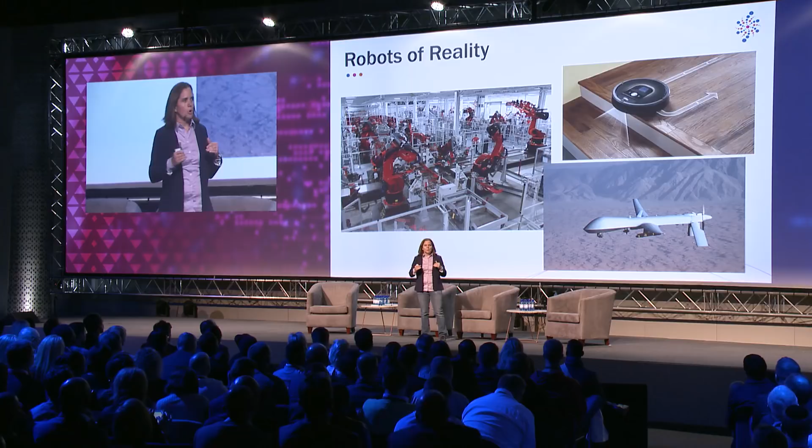And if we think about the robots of reality, they kind of match what we think of in our heads. So we have robots that help us, right? They manufacture goods for us, things like auto plants and manufacturing. We have robots that help clean our houses, like the Roomba and the Neato. And then we have scary robots, like the Reaper, that's been flown over Afghanistan and a number of countries.

So I want to be very clear here about what I mean by robot. I was actually impressed to know, when I showed up here, that robots are ubiquitous in South Africa, right? I'm not talking about traffic lights here.

So what I mean by a robot is something that senses and perceives its world, makes decisions based on that, potentially with the input of a human, kind of like what we just heard about, and then acts upon that and moves within its world. So those are the kind of robots that I'm talking about.

And we have two different types, and obviously a lot of hybrids in between. We have autonomous robots that do all of that on their own, so that would be like the Roomba - you just press go, it vacuums your floor, and then goes back to its charging base. And then you have teleoperated robots, where a human is actually a big part of the control, like the drone that you saw earlier when you came in here, or like the Reaper in this picture.

So there's a fair amount of interest in robotics as an exponential technology, and since I'm giving this talk here, I think it's pretty obvious that a lot of people think this way. But I think one of the interesting things right now is that the robots of reality are starting to get to the point where they have similar capabilities to the robots of our imagination. And this is a problem that roboticists fall into a lot - people imagine robots doing all of these crazy things. Well, we robotics researchers aren't quite there yet, but we're getting there, and we're getting there very quickly.

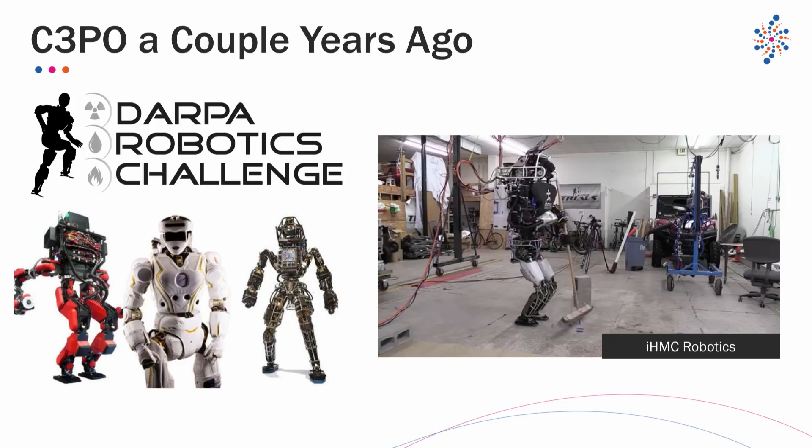And the idea that if you just had a robot that could have gone in there and turned a valve, you would have saved a lot of problems. So this robot had to complete a number of tasks: be able to crawl through or walk through a rubble field, turn a valve, open a door, get into a Jeep and drive it. There were a number of tasks that a human would be able to do just fine, but was a challenge for the robot. And what you see in this video is a robot effectively doing household chores.

And the video is sped up, the robot was a lot slower than this. But it's really not doing anything more complex than I am convinced my 4-year-old can do, although she doesn't do it. All right, so these are the kind of things where robots are kind of at this toddler level.

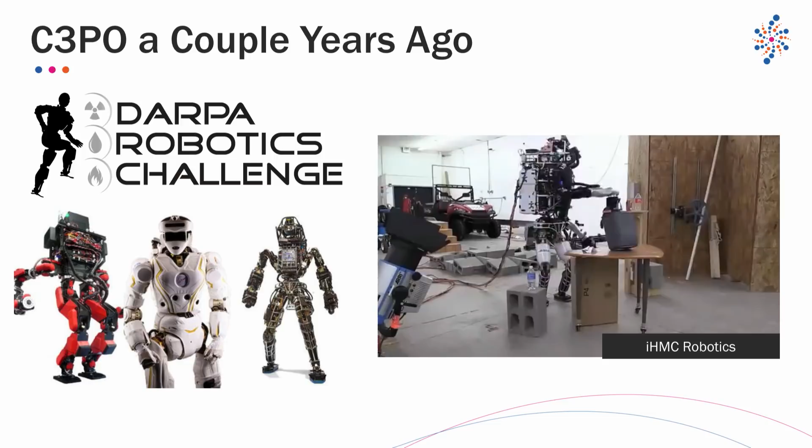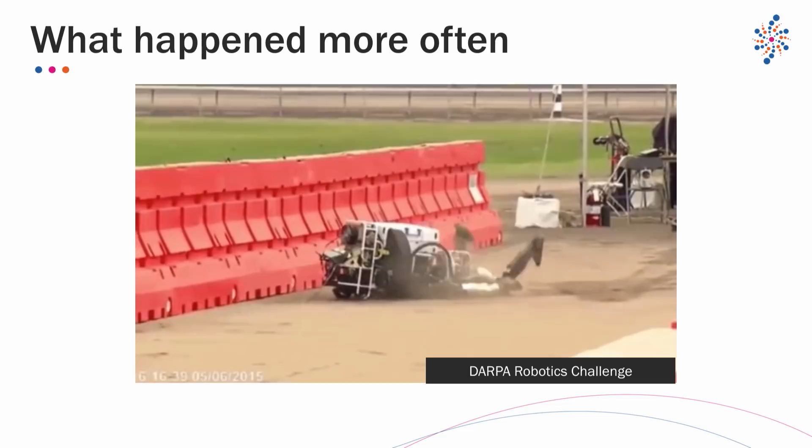And interestingly, when you got to the competitions in the finals in summer 2015, what you saw more were things like this. So this is really what you see a lot in robotics of reality - this is like my 2-year-old, oftentimes she'll be running and crash.

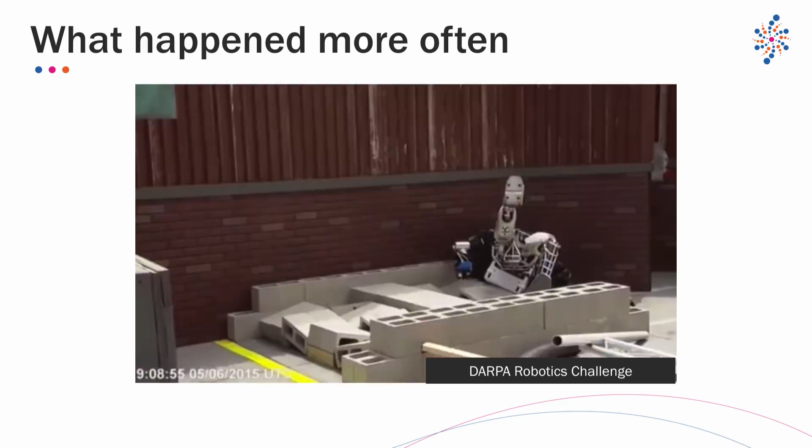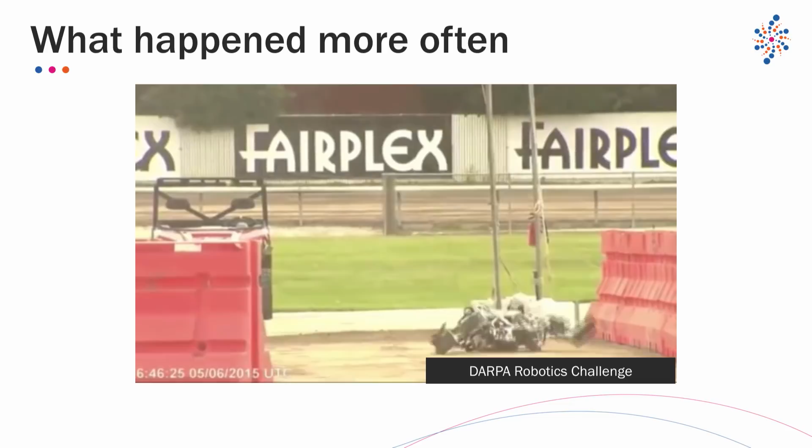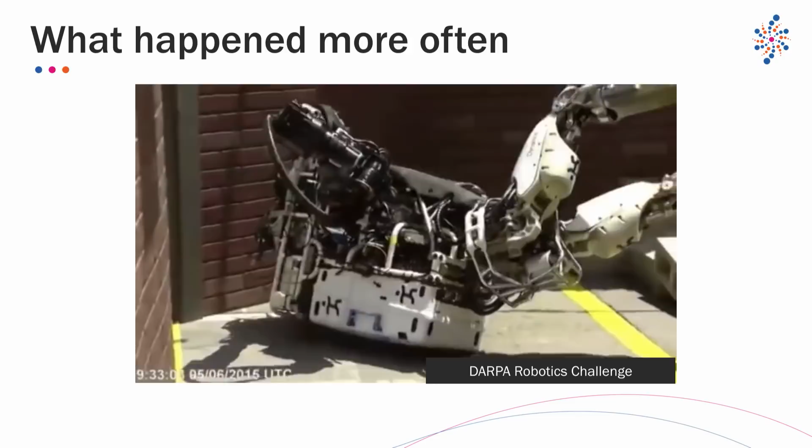This happened a lot in this competition, and there's a lot of technical reasons for that. One thing I want to make very clear is all of the robots you see on YouTube doing really cool things, there is at least hours of footage of them failing, unless there's been painstaking tuning or it's stated otherwise. This happens a lot in robotics, usually when your advisor is looking over your shoulder for a demo.

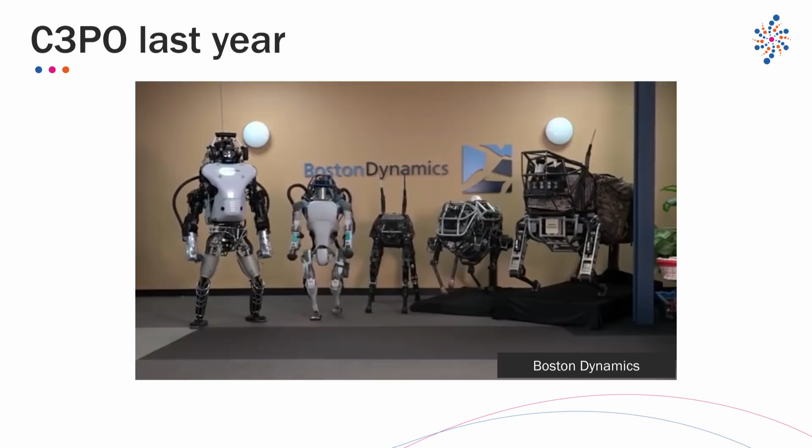Just last year, Boston Dynamics came out with a new version of Atlas that looks like this. One thing you notice right away is it moves faster and it's much more robust to its environment. It's walking through snow here. Some of you have probably seen the Big Dog videos from the same company. This is the same basic idea.

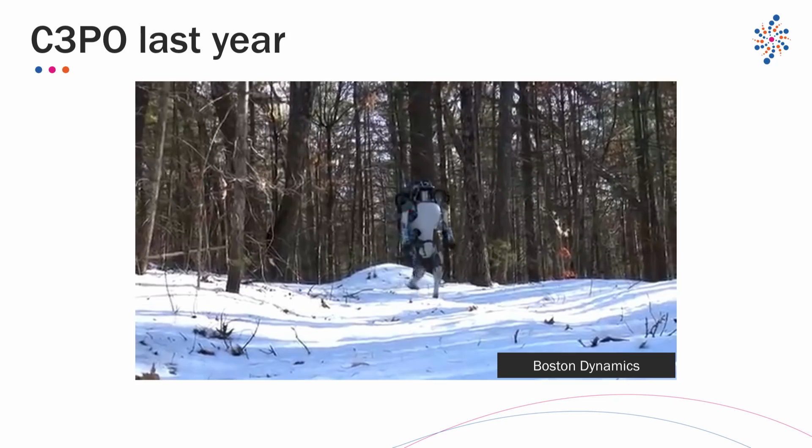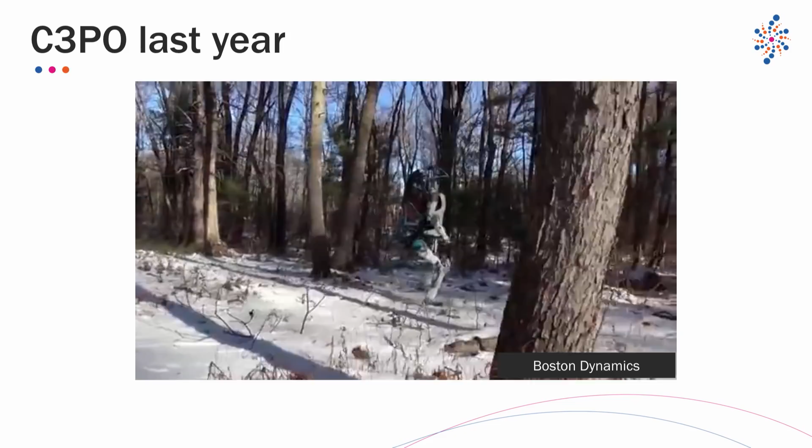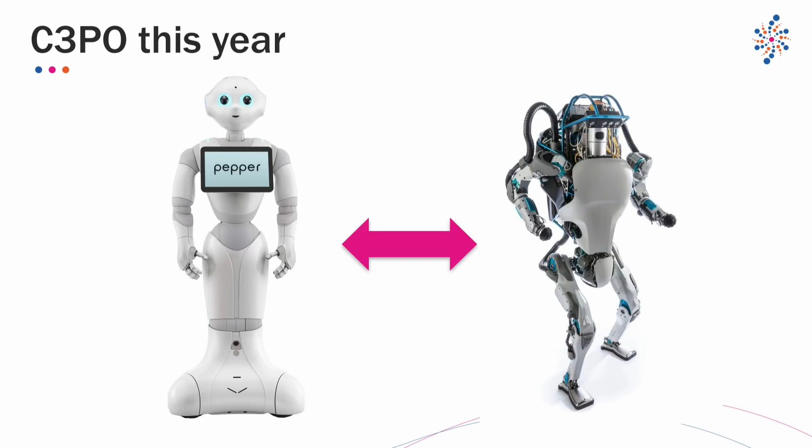This was enabled through a lot of technical developments, including things like 3D printing, which doesn't seem immediately connected, but is very connected to this. And then finally, just a couple months ago, it was announced that SoftBank is buying Boston Dynamics from Alphabet. SoftBank is responsible for the Pepper robot and the Nao robot that you can probably see up there.

These are very social. SoftBank's robots are designed to be very social. So I'm really interested to see what happens when you combine the physical capabilities of something like Atlas with the more social capabilities of something like Pepper. I think that's ultimately the interesting direction that SoftBank wants to go.

So there are a lot of reasons, I think, for this exponential growth in robotics. Obviously, you have computation, right? You throw more computation at a problem, it becomes technically easier. Another big thing is sensing. One of the sensors that's been developed has enabled the whole autonomous car thing, and a sensor is also responsible for the drones.

Just having an accelerometer and a gyroscope in a small chip package is what makes drones really possible. Autonomous vehicles are enabled by what we call RGBD cameras that also give you depth information in addition to the normal color stuff. So sensors have really helped push robotics forward quite a bit. They enable the robot to perceive its world much better.

Another big thing that is probably neglected a lot is the open source movement. A lot of the robots, including Atlas that you just saw, actually has code that works on it that's written in what's called the robot operating system. It's basically a database of code where you can try so-and-so's navigation algorithm or so-and-so's stability algorithm, and you can easily innovate on top of work that people have already done.

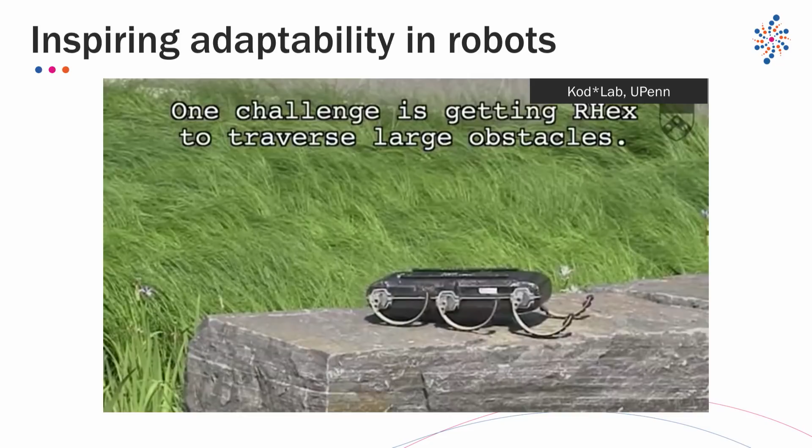But it does a pretty good job of getting through this kind of park environment. It can run through gravel, it can run through sand, it can do a lot of pretty impressive things, including jumping around. So this is actually the basic idea spun into a commercial enterprise called Ghost Robotics.

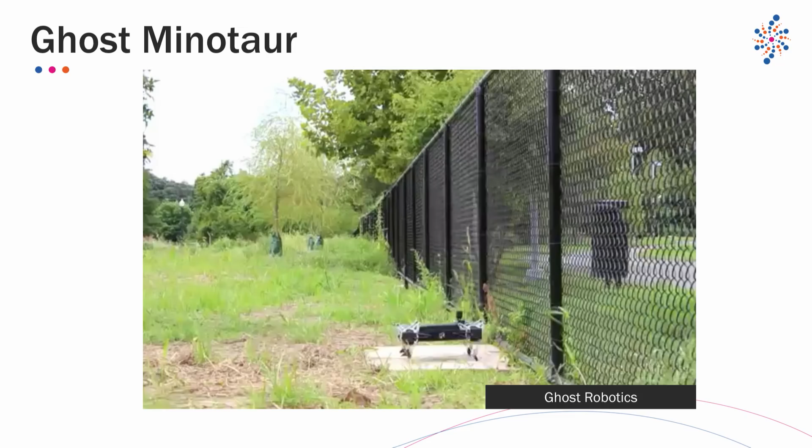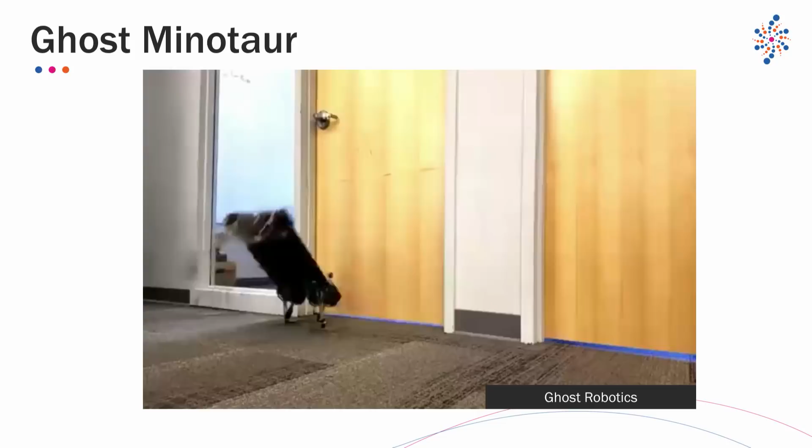And they do a lot. One of the things I didn't mention about RHex is a lot of that was due to the compliance of the legs. Just making the legs a little springy is what enabled it to do all of that impressive stuff. So Ghost Robotics, if you have $10,000 to spend, you can really prank your office mate by having this guy walk into the door.

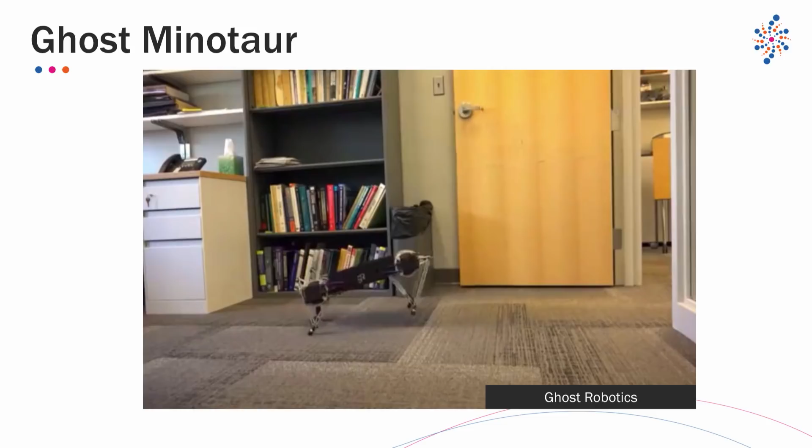So it costs about $10K, but it's a pretty impressive robot. A lot of what enables the Ghost Robotics robot is new developments in motors. I wanted to show this in part because this motor development happened because Sangbae Kim, whose arm you see in this picture, was trying to make a robot cheetah. He was trying to make a robot that could run incredibly fast, that could leap, as you see in the picture, and withstand the kind of perturbations and impacts that you would have in an unstructured environment. I'm very clumsy. I run into door jambs all the time.

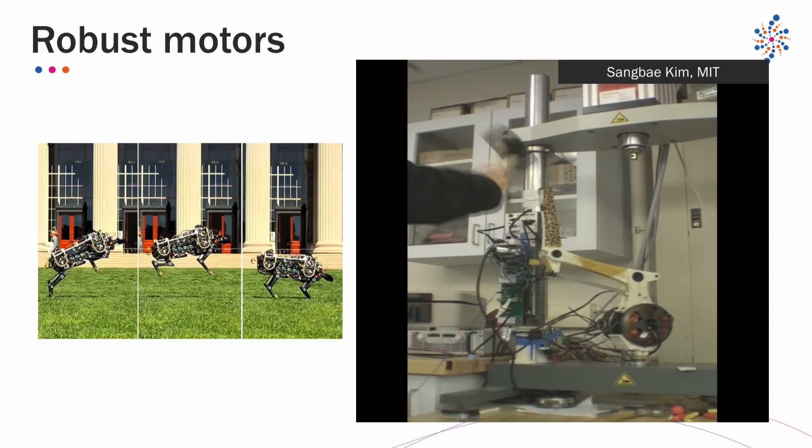But a robot like this could handle that kind of disturbance. This behaves a lot like the way muscle is, in that I can tighten my muscles and behave differently as I impact things. And so this allows us to get into new manufacturing environments, new application areas like mining, where you have a lot of bumping around and stuff as well.

Another way to become adaptable is to become very small. Ants are everywhere in the world. Spiders are everywhere in the world. Insects are ubiquitous, and this is from my own work. I confess this is a real ant and a real robot, but it happens to be a particularly large ant, a bullet ant from South America. But the robot itself is pretty small too, about 5 millimeters on a side.

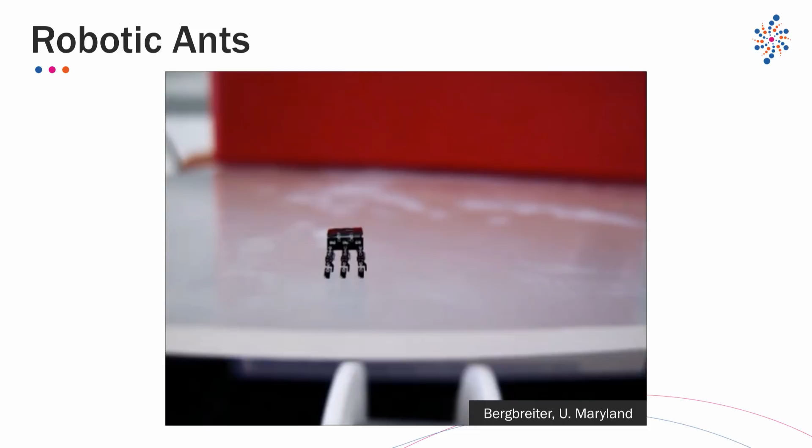One of the things we're doing with this is studying how to locomote when we're very small, as well as studying integration problems of how you combine motors and sensors and mechanisms at these really small size scales. And that can ultimately have a lot of impact in things like healthcare.

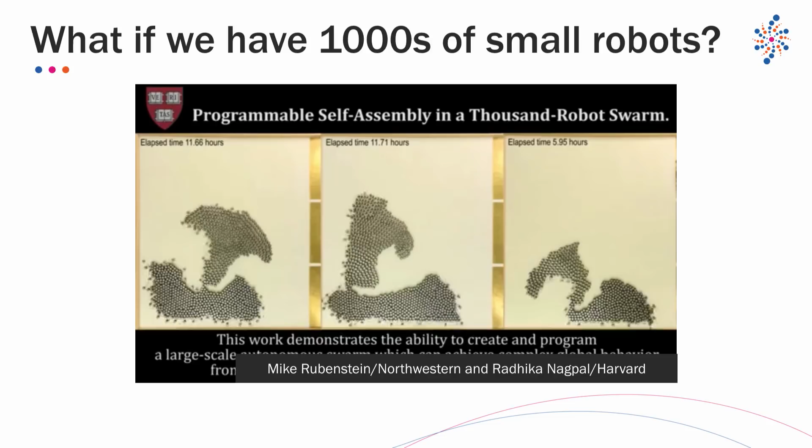Then you have the other idea: if I have a lot of small, simple robots, but I have a lot of them, say 1,000, this came from Radhika Nagpal's lab at Harvard, I can make them incredibly adaptable by making them into any shape I want. In this case, I have literally 1,024 robots, called kilobots, creating these shapes based on different algorithms defined on each robot. So it's pretty impressive stuff you can do if you have a lot of small, simple things in terms of adaptability.

So in addition to locomotion and being able to get around your environment, adaptability is also incredibly important in things like logistics applications and manufacturing.

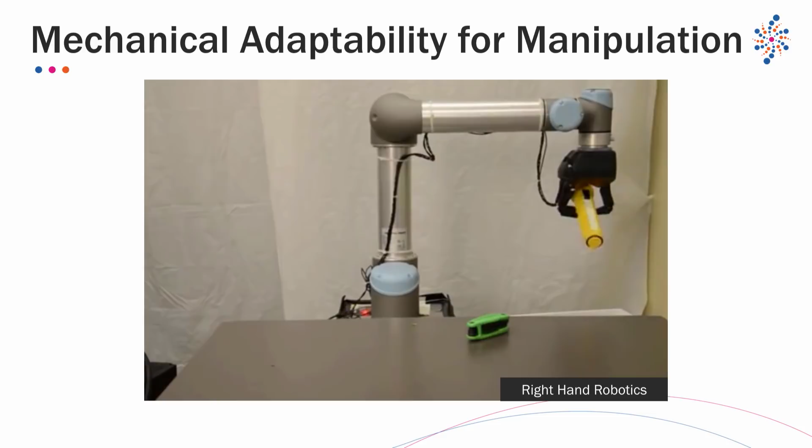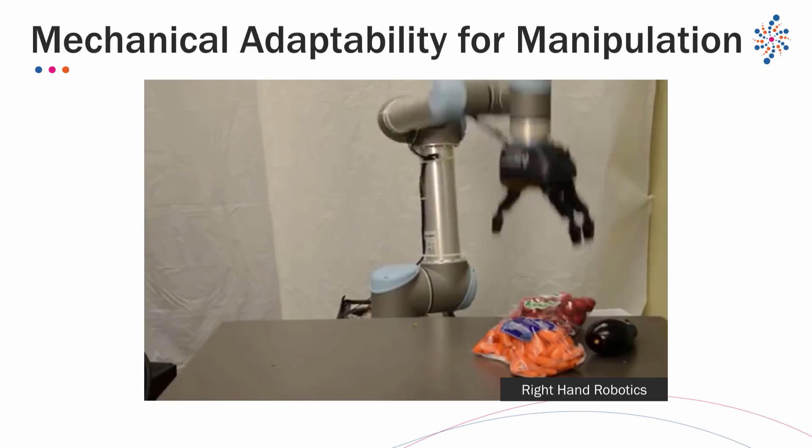This is a company where I have a friend, Right Hand Robotics, where they're actually designing a robot hand. Robot hands traditionally, unless I know exactly what my part looks like, have a lot of trouble picking up a part, especially if it's squishy or soft. In this case, what they've designed is this very compliant robot hand, much like the legs in Rex and the ant you saw earlier, that's able to conform to whatever shape it's picking up, a lot like we do with our own hands. But we have a lot of muscles that enable that. So we can make hands much more capable than they've done in the past.

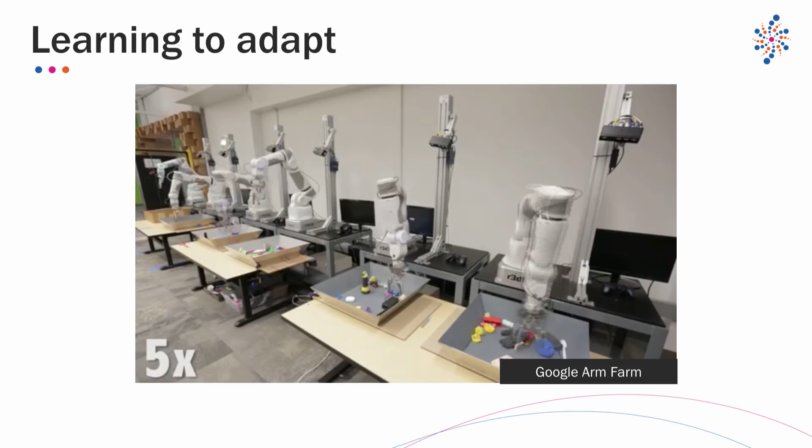We can also do things like incorporate AI and learning networks. This is a room at Google in California, and they have just a boatload of robot arms continually trying to pick up objects and determining, was I successful? Did I pick it up, or did I not? And changing the strategy a bit each time. Based on this, I can learn good strategies that work even with very simple grippers.

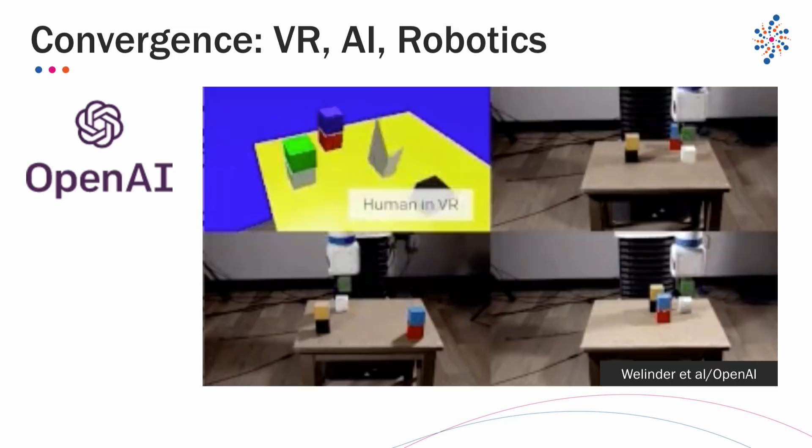This is one of my favorite new things. This happened about in May, a couple months ago. It came from the OpenAI project that Elon Musk has a lot of input into. In this case, what they were trying to do is take a human in virtual reality with one episode of training on a task. It's a very simple task, just stacking blocks. But based on that one episode in virtual reality, they had a robot learn how to do the same task regardless of where the blocks were originally. Now, in stacking blocks, once again, a 9-month-old can literally do that.

Right? At least 2 blocks, then they knock it down.

But in this case, what you're really doing is looking at this convergence of all of these different exponential technologies, virtual and augmented reality, AI, and robotics, and ultimately thinking about how I can have a surgeon in one place, maybe South Africa, training a robot surgeon somewhere else.

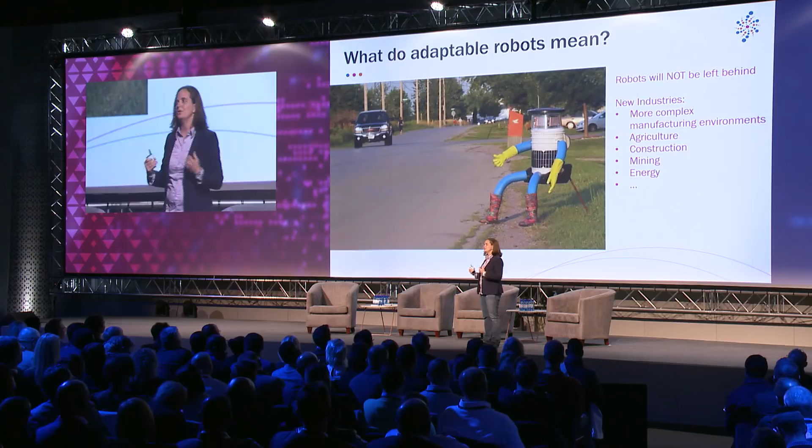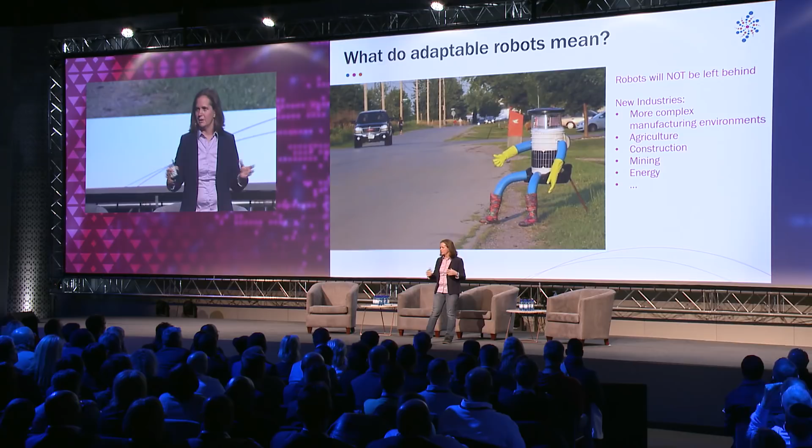And you can really think about the possibilities that are enabled by all of these technologies coming together, which are really exciting. One of the things that adaptable robots ultimately mean for us is that robots aren't going to be left by the side of the road anymore in a lot of these applications. We already have a lot of automation in things like agriculture and mining, but that's going to be much more so. Construction, things that require us to be adaptable to these unstructured environments, are going to be enabled by robot innovation in the future.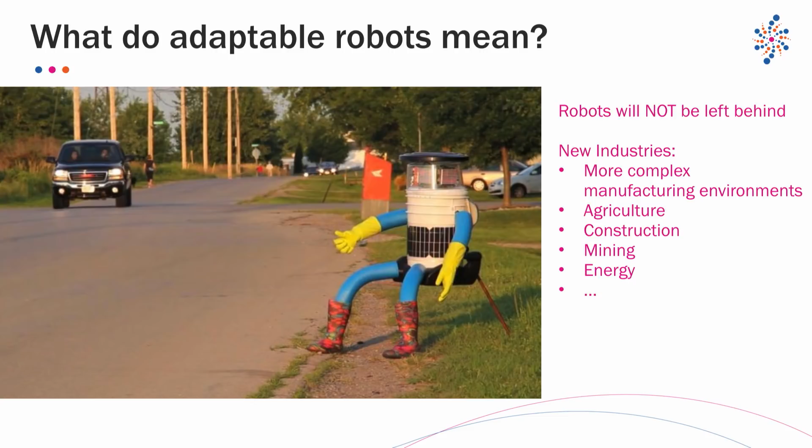We also have things like more complex manufacturing environments, and by that I mean manufacturing environments with people in them. So the fact that I have a person working next to me ultimately will not be a problem for these more adaptable robots.

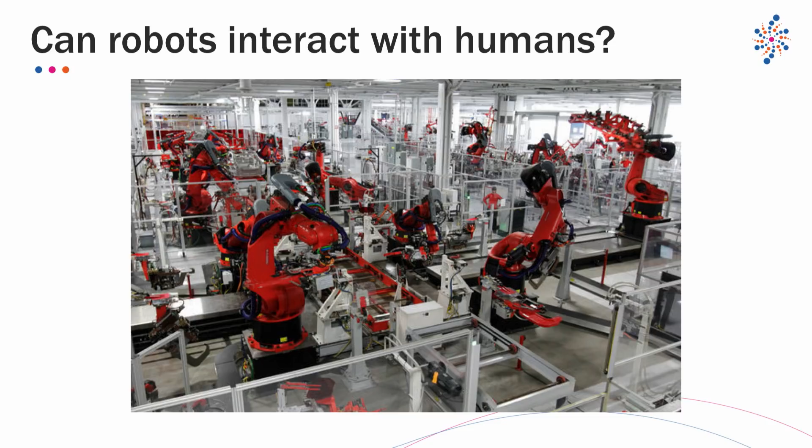And so ultimately what we want to do, if we want to augment human physical ability in things like manufacturing, we need robots to be able to work alongside people.

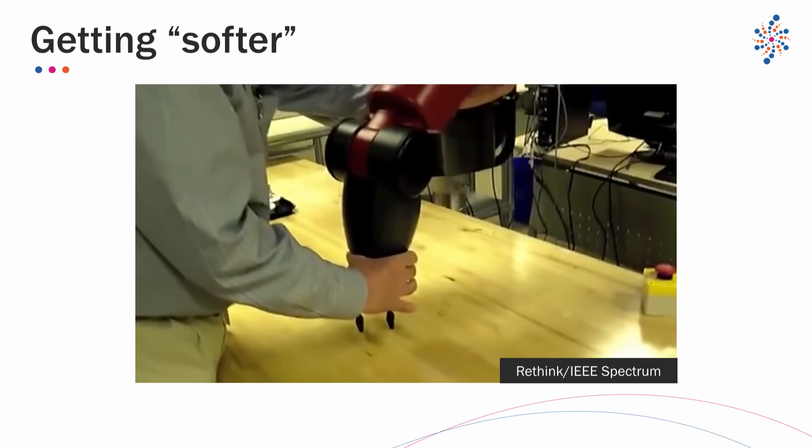So this is Baxter, which you saw earlier. One of the coolest things about Baxter is that this guy is actually touching Baxter, moving Baxter's arm, and in fact programming Baxter what to do based on how he's moving the arm. A lot like you'd take your kid and say, okay, you pick up your fork and then you stab it into this and you eat it, and you move their hand through the whole process.

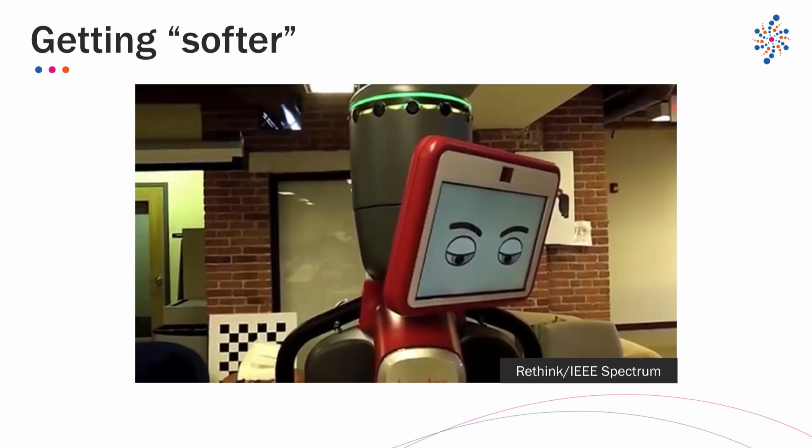This is how you can program a robot if you can touch it. So creating robots that are touchable, that can interact physically with humans, is a game changer in the world of manufacturing and the world of programming.

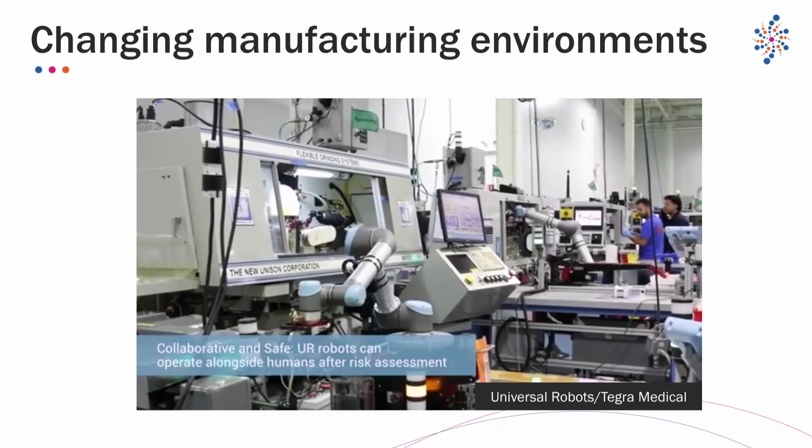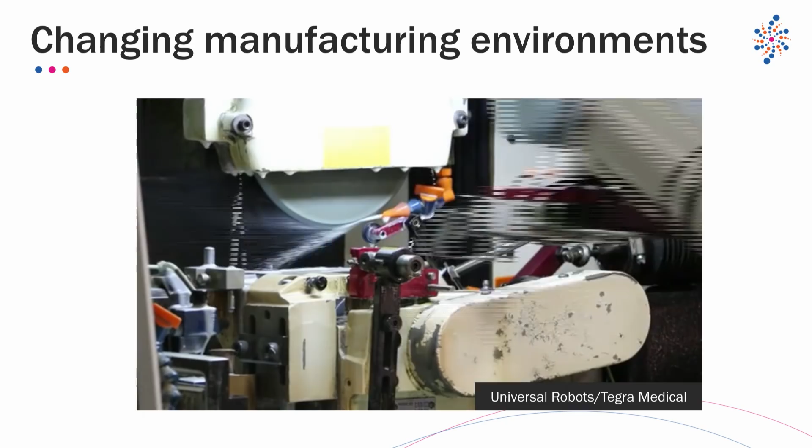This is actually a fairly low-cost robot at $25,000. But I can make things even more low-cost. This one is about $20K from Universal Robots, and it's actually in a manufacturing environment making medical devices. The idea of being able to have people and robots located right next to each other, and in fact physically interacting, ultimately means that I can take a room much smaller than this, put a bunch of robots in there that are relatively low cost, put a bunch of people in there, and create my own manufacturing system, at much lower cost than has traditionally been possible.

So you can actually have hardware startups now instead of just software startups. You can make things much quicker and easier with robots. And you can make them even cheaper if you change the materials that you're using and the actuation.

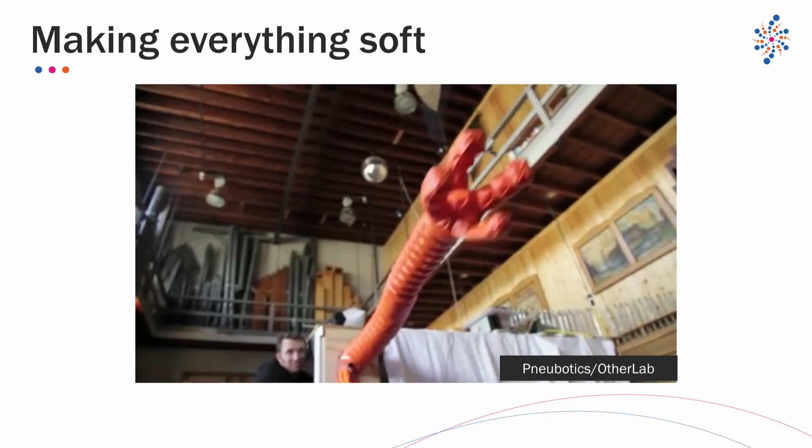So in this case, what you see is an entirely soft robot made out of fabric and air, from Pneubotics. And what you see it doing right now, it's going to start trying to draw a smiley face on this picture. And you see the problem with this robot: it actually draws a smiley face about the same way my 4-year-old draws a smiley face.

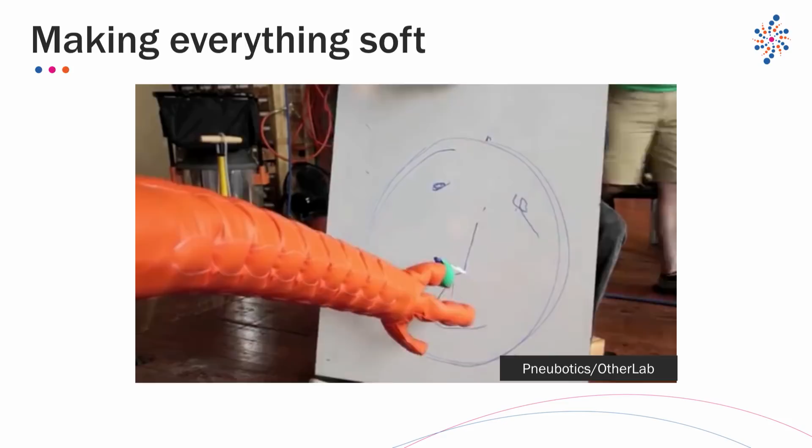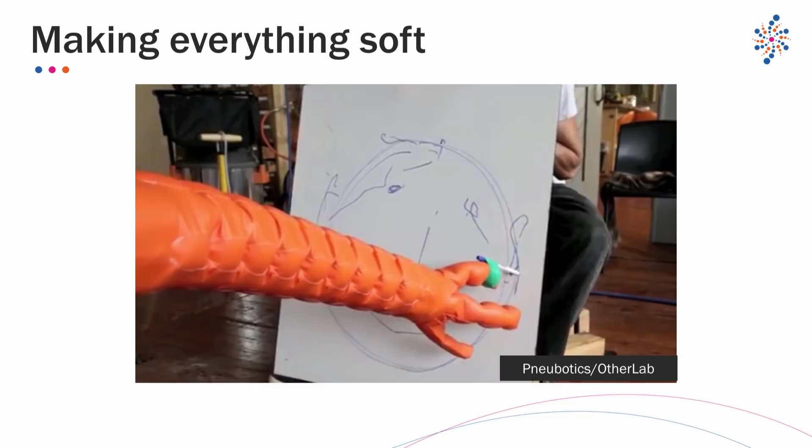One of those KUKA robots in the Tesla plant could draw perfectly. They could draw the Mona Lisa and do an amazing job. This one does not do so well. In soft robotics, though, this thing costs about $200. It's incredibly cheap. So if I can solve the problem of making these more precise and more repeatable, I can actually use that in a very low-cost manufacturing environment.

And in fact, I brought some things here. This is becoming such a thing in the robotics world of creating these soft robots that we have these floppy systems.

So this is a soft robot actuator that's made from the Soft Robotics Toolkit that you can look up online. Everything is open sourced, all of the designs. Molds are 3D printed, and then I mold this elastomer, this soft rubber, into it. You can see how it's soft and floppy. And if I inflate that with air, you can see it's more rigid now, and it's curling up. It can actually grab something, or you can imagine a much larger version of this.

Since we are in South Africa, I can say this is very much like an elephant trunk, right? So you can think about all the crazy cool things you could do if you had an elephant trunk that cost a couple hundred dollars, in terms of manufacturing, in terms of all sorts of things. So actually, if I don't kill you, I'll throw this out to you. You can pass it around. They're cheap enough that I don't care if I lose a couple.

You guys can pass it. It's in the other direction there.

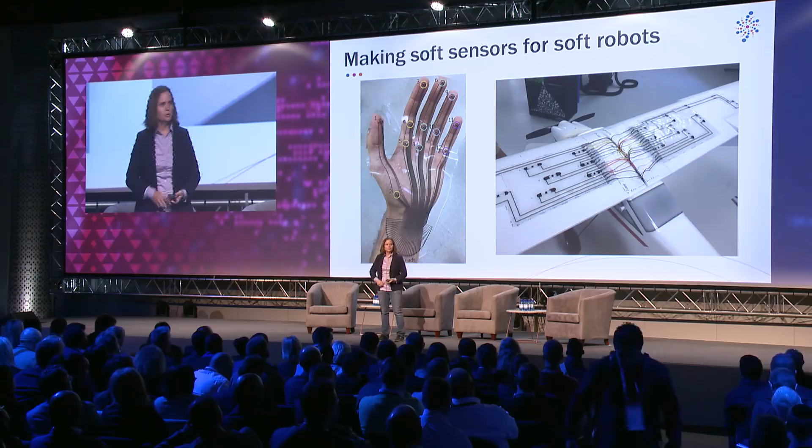Soft robots, I think, are a really exciting direction for manufacturing, but they're also exciting for other things if we can figure out this sensing problem. In fact, my group, my lab, works on a lot of soft sensing. So I have some soft sensors right here. The idea is being able to detect strains or pressures, but all with a very soft substrate that would work with these soft robots. Once I know where my arm is in space, I can make things much more repeatable. So there's a lot of interesting work in this area happening as well.

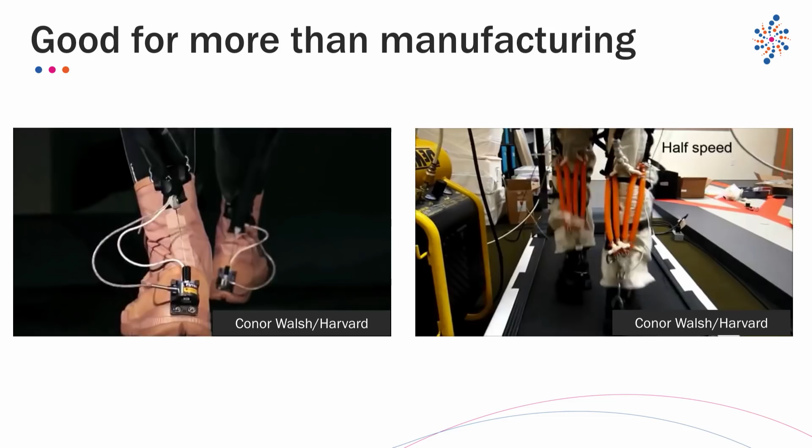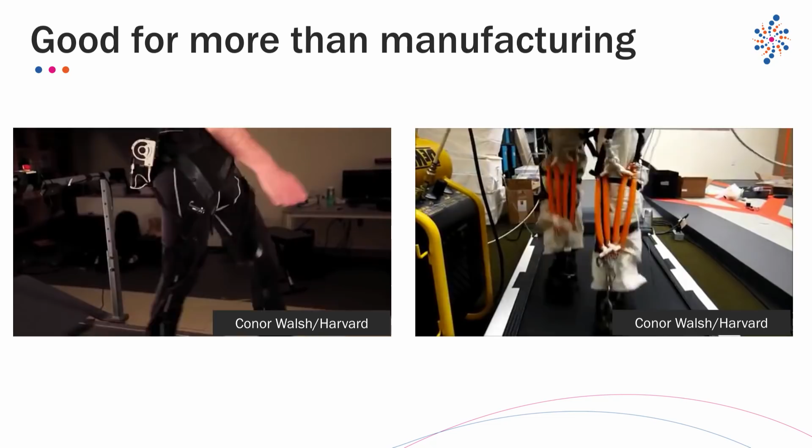And it's good for things beyond just manufacturing, right? So we can think about soft robots. The real innovation is being able to interact physically with people. And so if I think of trying to teach a kid how to walk who has some kind of neural disability, or trying to teach an elderly person how to walk after they've had a stroke, a good way to do that is through a robotic exoskeleton. But Iron Man is a little too rigid, right? If I take away the iron and add rubber, it's a much more inviting thing to wear, rubber or fabric.

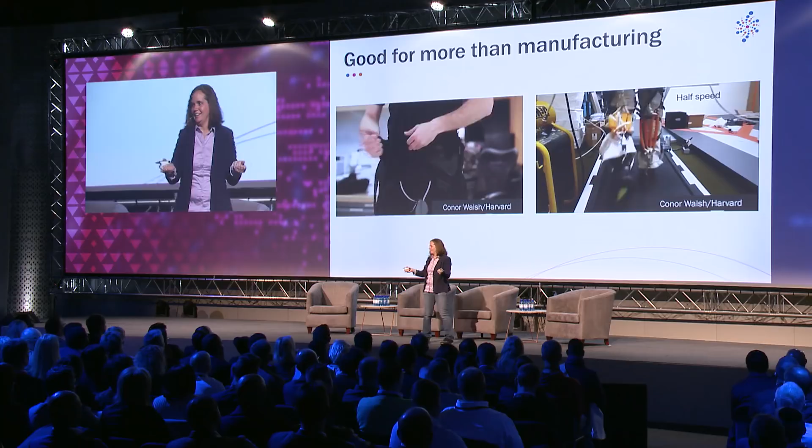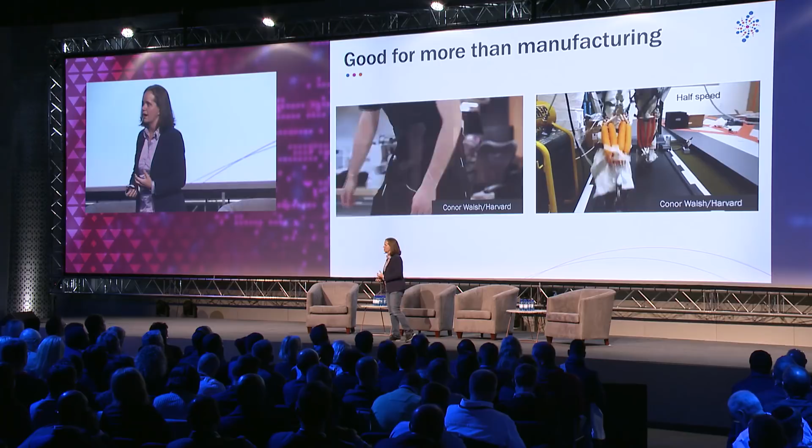So I can think about both augmenting humans in a manufacturing context and some other kind of work context, or I can think of the healthcare benefits of this. And ultimately, there's some incredible possibilities, but once again, enabled only once robots can physically interact with people, or people can physically interact with robots.

Robots also allow us to show up in places where we can't otherwise go. You may remember the US government was shut down a couple years ago, so the NASA CIO had to show up on a telerobot, a telepresence robot, basically an iPad on wheels. I used one during my maternity leave and ended up crashing into my students, in part because it's missing arms. It needs arms in order to tap on people. I think that's one of the big innovations to happen there still. So my students were very scared.

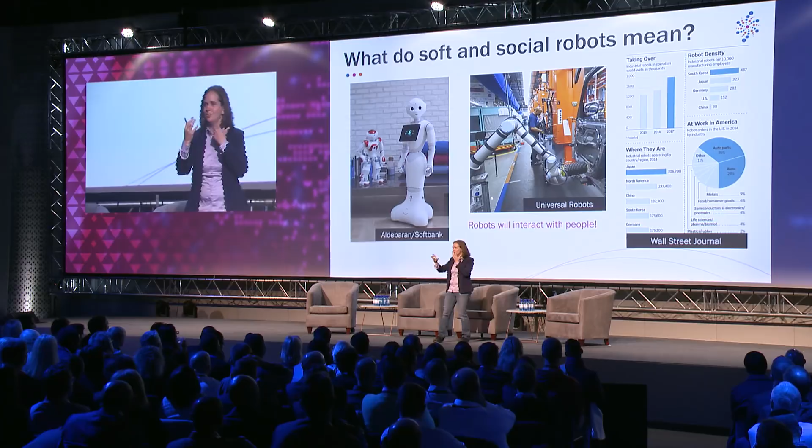So soft, social, safer robots ultimately mean that robots can interact with you and I. We can touch them. We can socially interact with them. And there are many, many implications of that, ultimately, especially around ethics and the like, and jobs.

So finally, I want to talk a little bit about autonomy in robots. This is enabled really dramatically by the artificial intelligence you just heard about. But obviously there are a lot of reasons why we might want to take a human out of the application, out of the particular environment, like texting while driving and the like.

Really, the way this is enabled is through the better ability of a robot to perceive its environment. I would also add understand its environment, but that's a somewhat loaded term. At least kind of parse into categories some of the things in its environment. So this is an autonomous vehicle driving down the street.

This is what the algorithm would ultimately spit out. So you have things to worry about, like the person walking across the street, along with the vectors showing you which direction they're walking in. Red means warning, pay attention to this thing. Orange with the car driving through. It's also able to know this is a car, this is a person, and then a lot of the clutter in the background, like the trees, stop signs, that sort of thing.

Although it is able to detect this is a stop sign. There was some recent research saying you could confuse an AI by putting stickers on a stop sign, but there's some subtleties to that particular experiment. Anyway, the idea of being able to perceive your environment, through new sensors and new algorithms, is really what has enabled this whole direction of autonomous vehicles.

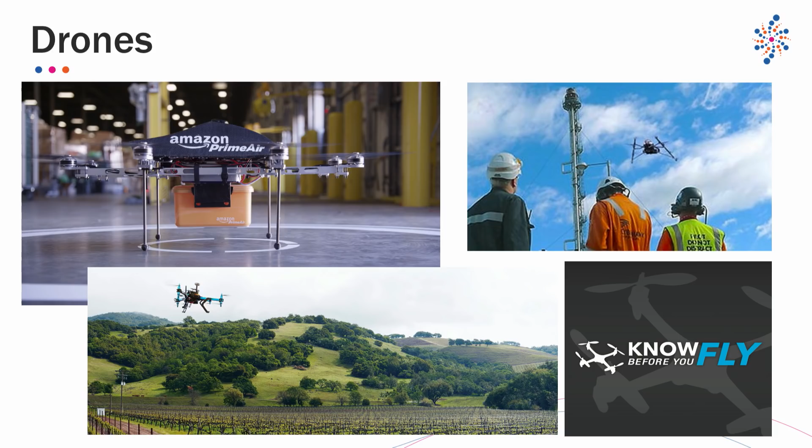This is often the direction people start thinking of when they think of robotics, and you just saw a drone here. We're going to get to see drone racing in the future, creating an entirely new category of sport. But drones have incredibly useful applications, especially in areas where traditional infrastructure is hard.

Maryland's actually affiliated with a test site in southern Maryland, where the Chesapeake Bay is between DC and southern Maryland, flying medical supplies across, for example. Agricultural applications too, attaching a hyperspectral camera to a drone and understanding how your crops are doing at any particular time, what you need to be doing to them. There's a lot of stuff there. Inspection too - I get a lot of questions from energy companies about using drones for inspection tasks, and this is a whole area that's starting to come up in great detail.

This is one of the examples I like from the African continent. A friend of mine was a technical advisor for this company called Zipline, and what you saw them do there is package up some blood. They put that carrier on this fixed-wing drone, so it looks like a little airplane basically, and launch it. The idea is being able to solve some of the infrastructure challenges, leapfrog them with drones, and be able to drop off your cargo at its destination.

It deploys a little parachute, and there goes the blood, basically being dropped off where the medical supply was needed. This is deployed - this is actually happening right now in Rwanda. They actually launched this. One of the cool things, one of the reasons it's called Zipline, is if you see the landing right here, it actually gets caught by a little line. It's like landing onto a carrier.

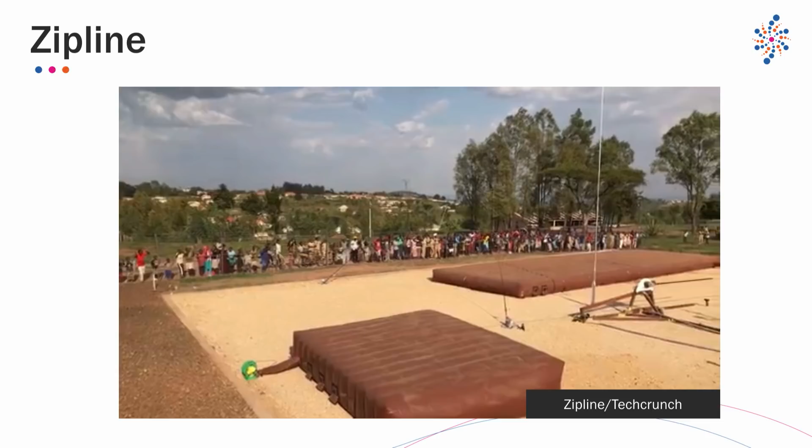They do this so they don't need the infrastructure of a runway even - they can just launch this thing and capture it when it returns. They have all these fancy designs, fancy architects that they've hired to create these drone depots at various locations as well, which is very cool.

Another approach to that is using Matternet. Matternet is a company that came out of Singularity University's Global Solutions Program, which is a summer program. They're also doing medical supply deliveries in countries like Malawi, and also in some European countries like Switzerland now, I believe. In this case, they're taking the quad rotor type approach, which is the drone you saw earlier. But really interesting applications if you can take these semi-autonomous robotic systems - and these are almost entirely teleoperated in some fashion.

There might be some autonomous capabilities, but take these systems and be able to use them to basically help people where they need help and at the location where they need help. And you don't need all the logistics that you would need otherwise.

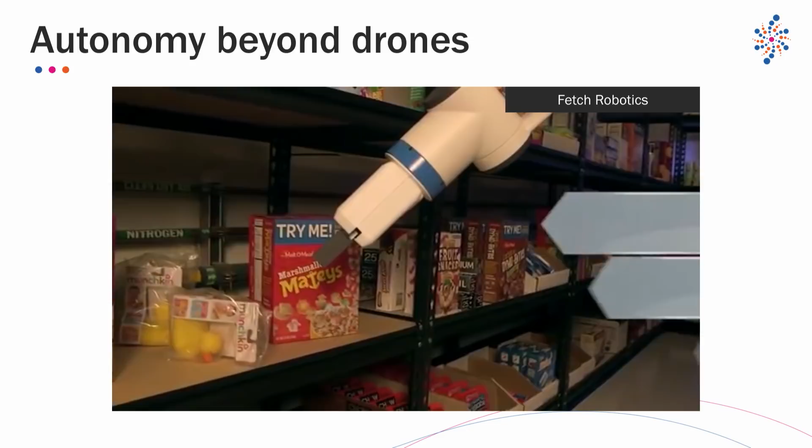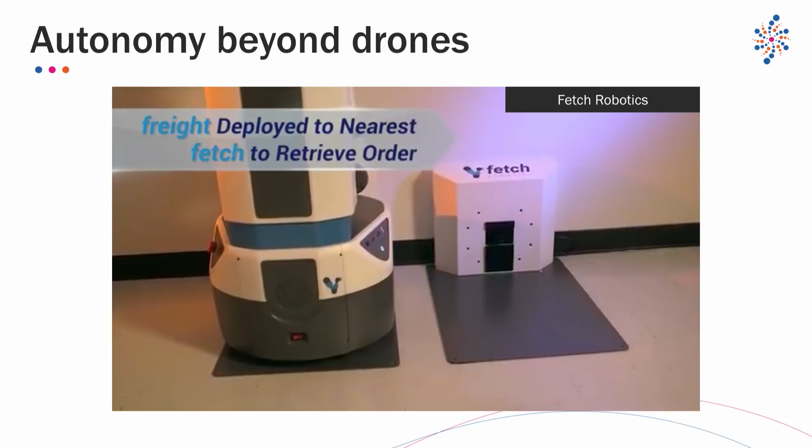So autonomy goes beyond drones and autonomous vehicles. This is a huge area of investment in the US right now in warehousing robots and logistics robots. This is a company called Fetch. This robot is using a combination of arms and being able to drive around, perceive the exact object it needs to pick up, and place that in some bin to go off to be packed in a box. There's some really incredible opportunities. Amazon's pursuing this in terms of logistics and warehousing enabled by these autonomous systems.

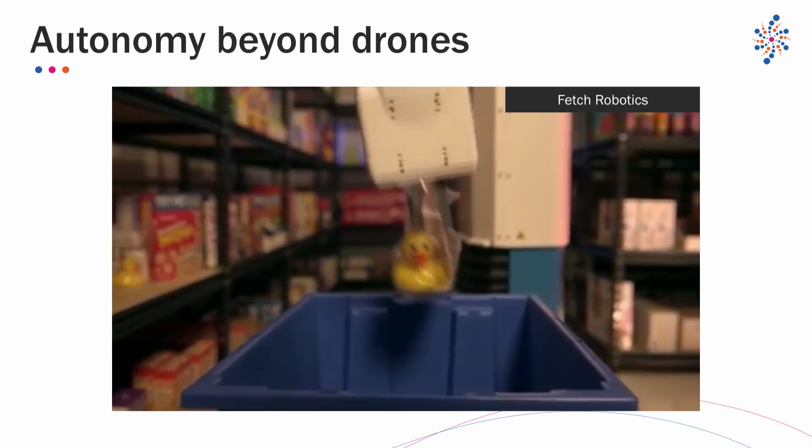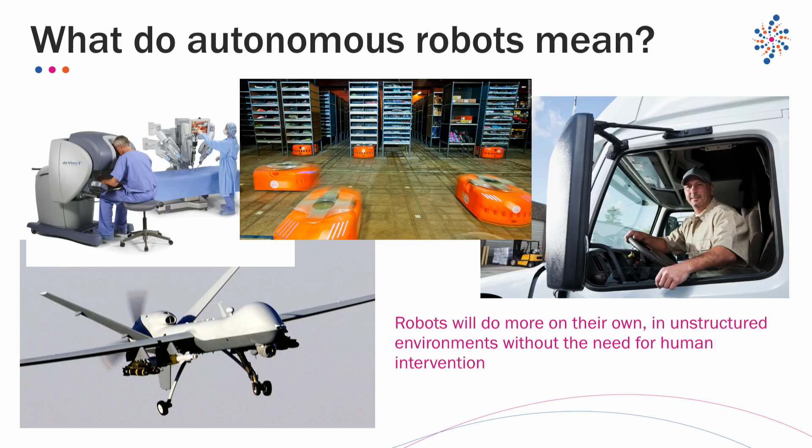So autonomous systems really have a lot of implications in a lot of different areas, right? Everything from warehousing and logistics, autonomous vehicles, but also some interesting areas like medicine. So autonomous surgery, the idea of being able to have a robot do everything or a lot of the work without the surgeon's input. I have a colleague who's working on this area.

You also have some big questions that are going to come up over the next couple years, and are already here, really, about autonomy in weaponized systems. Right now, there's a guy in a La-Z-Boy who's directing that thing around. But once you add autonomy, you've opened up an entirely new can of worms. Autonomy means you're going to be able to do a lot more with robots in these unstructured environments without the input of people.

And that ultimately leads us to a lot of the ethical questions that we're going to have when we face the robots that we've created, of how much autonomy we want on particular systems. It's a discussion that we need to ultimately have. There's various schools of thought on ethics in robotics and how you actually implement that. It's a really interesting question that hopefully I'll get to discuss with some of you a little bit later as well.

So ultimately what this means, all of these videos, all of this stuff that I showed you and told you about, is that it is a fascinating time for robotics. I feel incredibly lucky to be researching and teaching in this area. We're going to have adaptable robots that are able to get through more unstructured environments, that are able to adapt to unstructured manufacturing environments. It's going to open up an entirely new way of what applications robots can participate in.

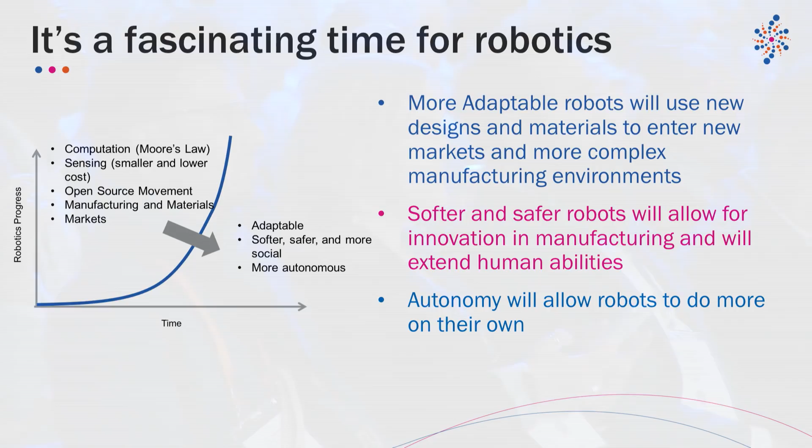We're going to have robots that are softer, safer, more social. They're going to interact with people. They're going to get into, once again, new markets. They're going to enable new paradigms in manufacturing and enable some countries that haven't done a lot of manufacturing in the past to once again leapfrog places like Southeast Asia by combining robots with humans and taking the advantages of both and making more impressive products that way.

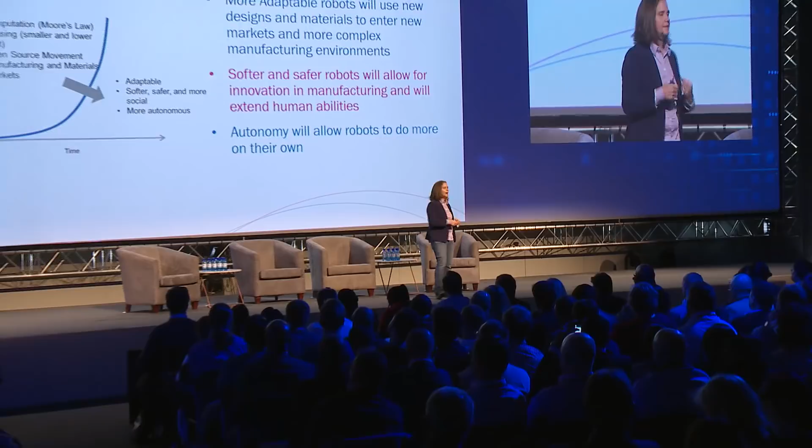And finally, autonomy is going to allow robots to do far more on their own without human input. And it is also a fascinating time to learn about robots.

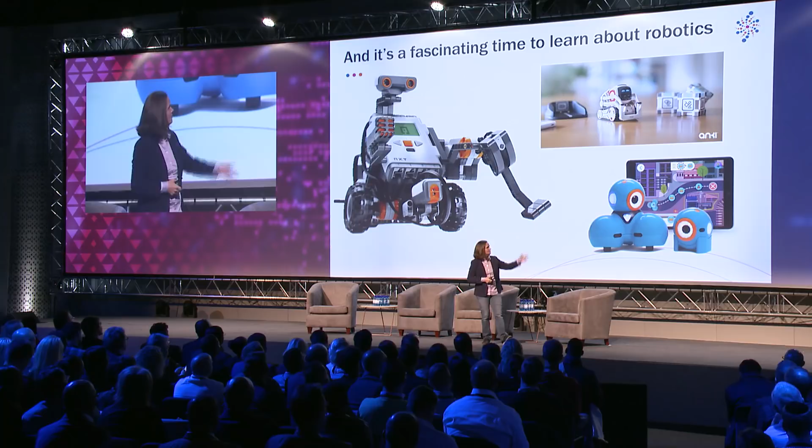The most often question I get asked is what robot I should buy for my kids. Lego Mindstorms is fantastic. You get to build, recreate all of these different robots. Up in the far right is the Anki Cozmo, which is really cute. I think we actually have one here as well. And then Dash and Dot. I have all of these for my kids. They're a little young for them still, but Dash and Dot are actually great for my 4-year-old.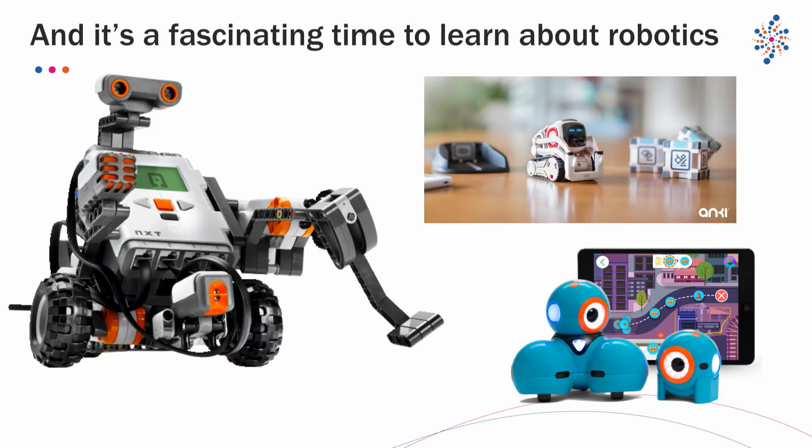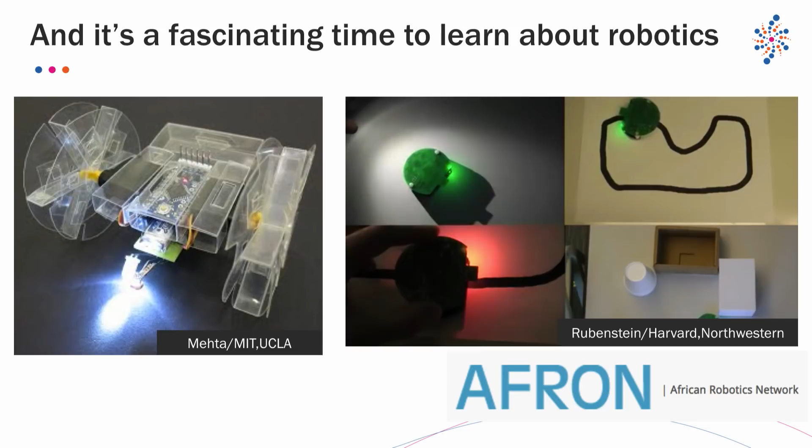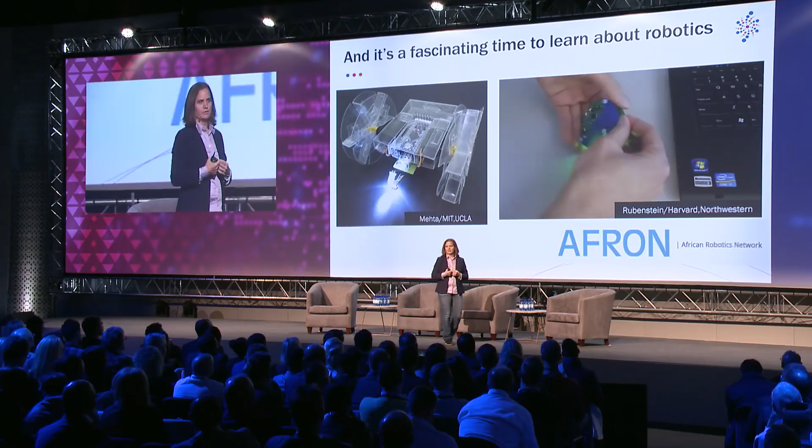One of the other things I wanted to say is that it's a fascinating time to learn about robots throughout Africa as well. I have a couple friends who participated in this challenge presented by the African Robotics Network, or AFRON. The idea was to design robots at the $10 price point that could allow students to explore and create new systems and explore new algorithms. On the right, you see both a software environment and the hardware robot, all of that done for $10, and all designed for a basic level of education to enable people to start playing with and creating new things with these robots.

The one on the left is actually printed. It's incredibly cheap. It's all made by this basically paper with a couple servos plopped in. So all of it incredibly low cost, enables a lot of kids to start creating and playing and learning how to learn effectively, augmenting themselves.